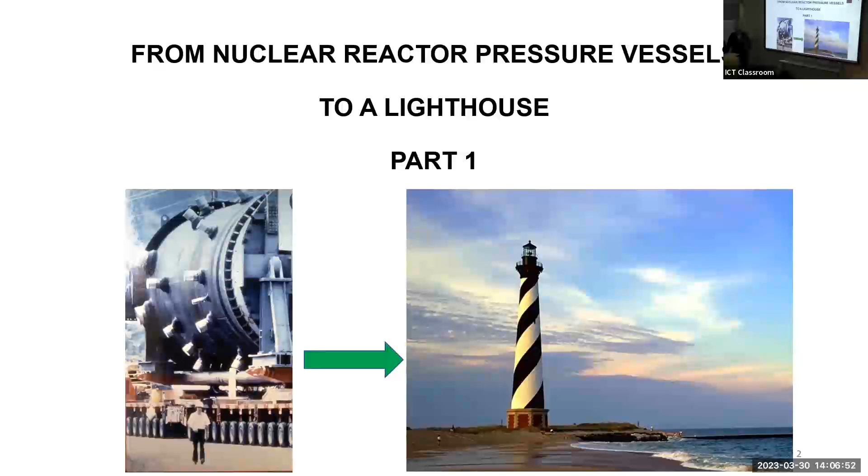So anyway, without further ado, let's talk about moving from nuclear reactor pressure vessels to a lighthouse. As I say, this is part one. Part two will be some other time to be determined. But I consider it a warm-up project for the lighthouse project.

This was 3 million pounds. The lighthouse was 10 million pounds. So it was kind of a practice project for that.

So a contractor comes to you, you're the senior engineer sitting in your office, and he says, hey, we've got to move 2 nuclear reactor pressure vessels from Knoxville, Tennessee, to the TVA's Phipps Bend plant up in Northeast Tennessee. You say, wow, that'd be a lot of fun. He says, oh, by the way, these things weigh 3 million pounds, and we've got to get a permit from TDOT in order to move these.

It's a little bit heavier than your normal weight. And so you talk about the schedule.

Year one, you evaluate and determine what requirements are needed to upgrade the infrastructure. In year two, they move the first vessel and the associated equipment with that. And then in year three, you move the second vessel equipment and do any damage assessment if need be. So you're hoping there won't be any damage, but it'll be assessed in year three if there is.

So if we look at the route, the first leg is 26 miles overland, going from Knoxville up to here. Then it goes back in the water for 35 miles on barge, and then comes back out of the water and goes the last 20 miles up to the plant.

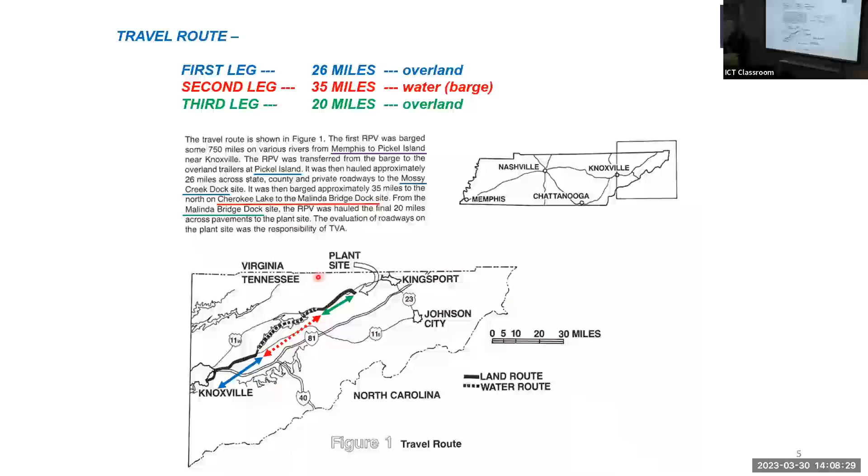Part of the reason for going in and out of the water was the river couldn't be counted on to have enough draft to get the thing moved. These were fabricated in Memphis, Tennessee, which is far west Tennessee, and barged on the Tennessee River up to Knoxville. So that's a little bit of history on that.

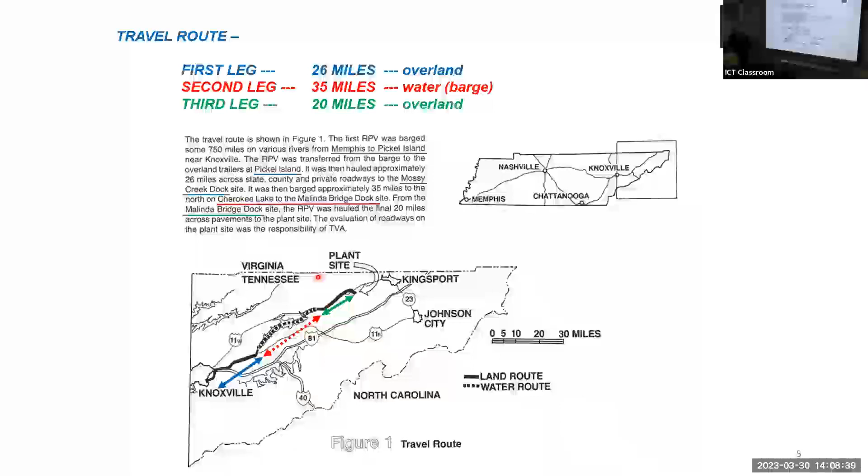Things you're worried about when you talk to the contractor: well, you're concerned about slope stability. Northeast Tennessee has a lot of hills, so you have a lot of cut slopes and fill slopes that you're worried about. We're going to drive 3 million pounds across it. What's that going to do to the slope?

To give you a feel for what this is like, it's like taking 10 feet of fill and moving it down the road. That's what you can equate this to. When I work on projects, I always try to think of things I can relate it to, to give a better feel for what I'm really doing.

Then you're going to be concerned, obviously, about underground utilities, culverts, pipes, and things like that. Pavement design—pavements are designed for millions of loads. When I was in school here, designed for 1 million equivalent single axle loads during a lifetime was a lot. Now you're looking at tens of millions of loads, and not 20 years of life, but 40 and 50 years of life. So things have changed.

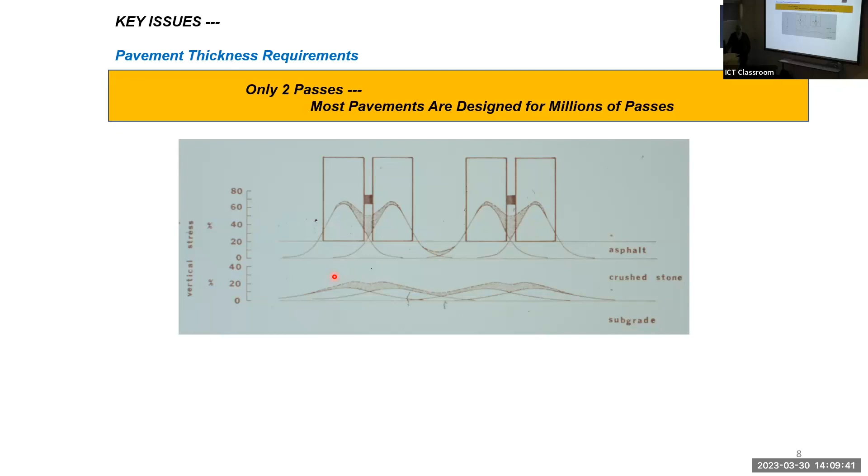But you're only going to have 2 moves with this thing. And the contractor has already won the bid—he's got a $12 million lump sum bid to move these things from Knoxville to the plant site. So you're constrained in your money as well as the time issue.

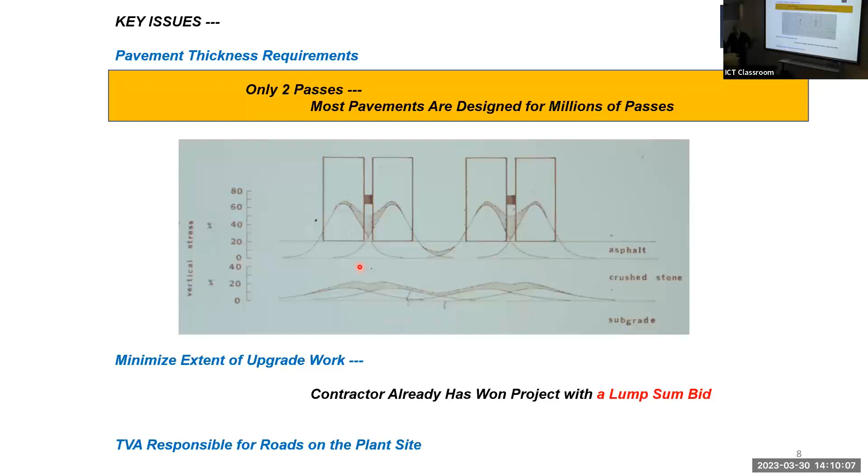You're going to deliver them to TVA's front door, and then TVA will take the vessels from there. But you're responsible for these state, county, and private roads and getting a permit from TDOT.

So what are the objectives? You talk to the contractor, it's the same thing you always hear: on time, on budget, and no damage. That's what the contractor wants. What are you as a consultant concerned about? Well, slopes, underground utilities, where are the pavement sections, what do they need to be, and the bridges—this has got to go across the bridge.

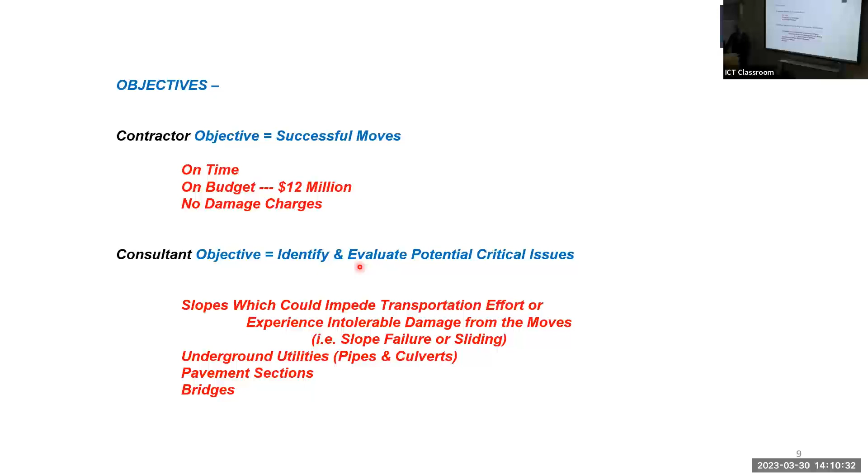Most of those aren't designed for 3 million pound loads. And this is what it looks like. This is the first vessel, and you can see the vessel itself here, and then this is part of the frame that holds it onto the trailer system, along with all the accessories that come with it.

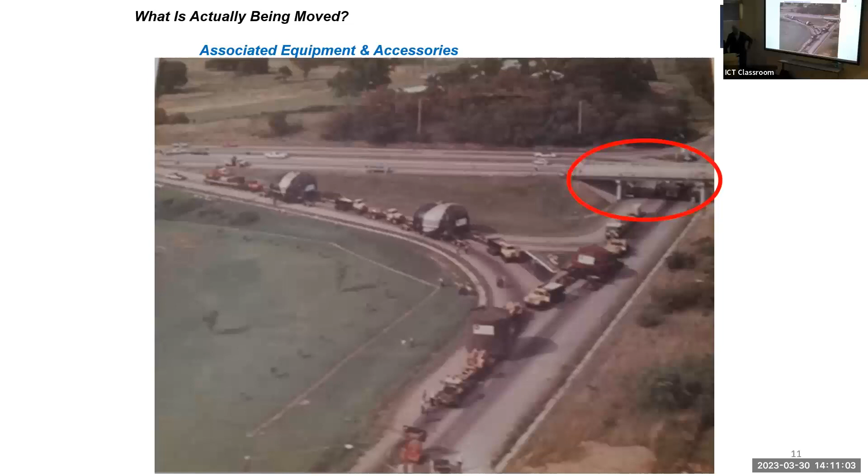The heads for the reactor, the shroud heads, and you can't go under all of the overpasses along the route, so you've got to come off and go around, and sometimes the route gets pretty curly.

So what's the transport system look like? Well, it's a trailer, two sections. The front section is modules - you see 6 of them, 2 across and 3 in length. There are 4 axle lines on each one, so that's 4 axle lines, and then 4 tires, 8 tires per axle line.

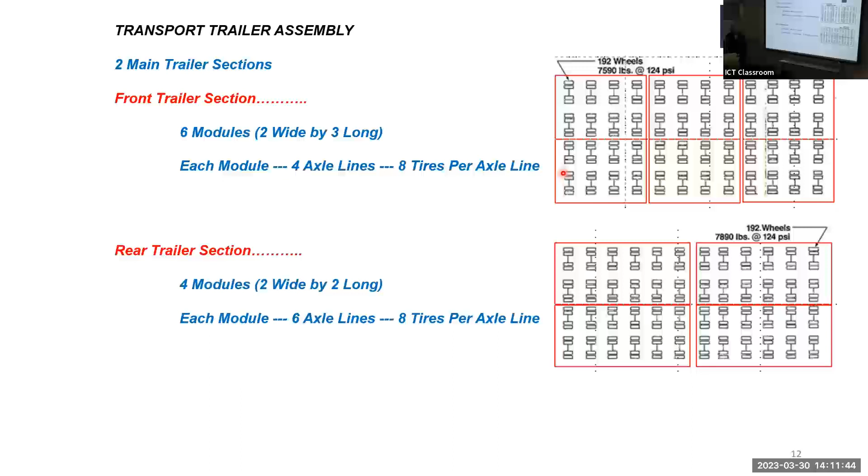This being an axle line, and then coming across to the other module is the rest of the line. The rear section is essentially the same, except it's a 2 by 2 module, 6 axles instead of 4, and each axle line has 2 dual wheels on the end. These are 8 1/4 by 15 Michelins, but not the kind you'll see on your car - they're a little different, as you'll see.

For any of you involved with ABC, accelerated bridge construction, where they build the bridge near the final resting spot and then move it into place all in one fell swoop - a lot of times you'll see these kind of trailer sections used to move those bridge components into place.

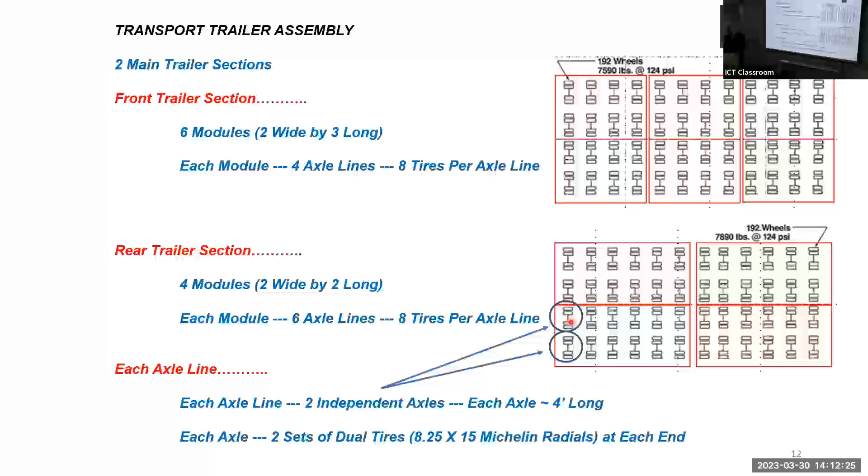So we get it all together - we've got the vessel on top of the trailer system. We've got 12 axle lines and 16 tires in each section, for 24 axles, 384 tires.

It's kind of like what the Greek guy said - I can't think of his name - give me a lever and a place to stand, and I can move anything with the lever. This is kind of the same way: if you give me enough tires, I can move anything, okay?

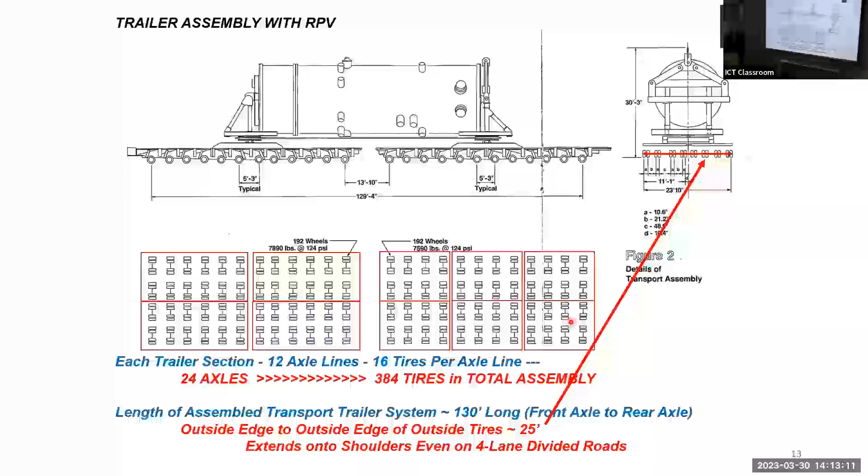So the length is about 130 feet, rear tire to front tire, and the outside is 25 feet wide, outside of tire to outside of tire. So even on the 4-lane divided state route, this is going to hang over onto the shoulder. The height is a little over 30 feet, so you're not going to go under the power lines either - they have to be raised and lowered, and some were actually moved temporarily.

So as you start to think through the project - your little pavement design, that's what I call it - there's a whole lot of other things you've got to be thinking about, particularly if you're the project manager, and places you've got to interface with.

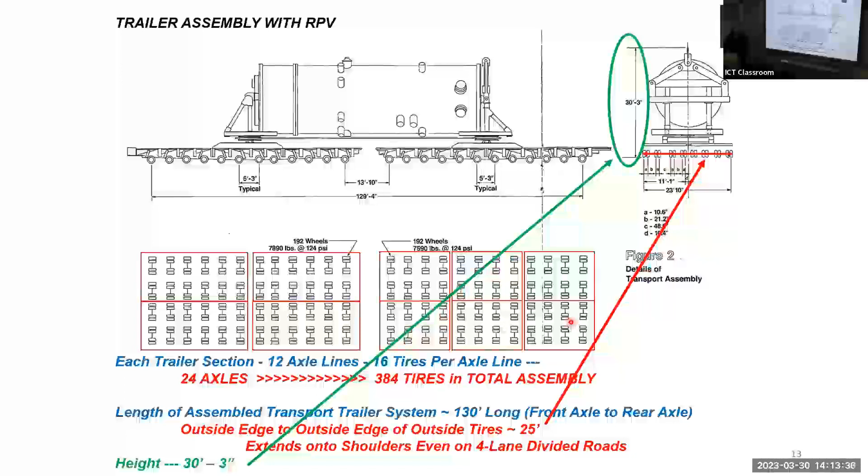If we look quickly at the details: the tire spacing center to center of the duals is a little under 11 inches. The center to center spacing of the entire interior tires is 21 inches. The axle to axle spacing on a section is about 7.5 feet. And interestingly, the spacing between axles was a little over 5 feet - we'll see that's important later on.

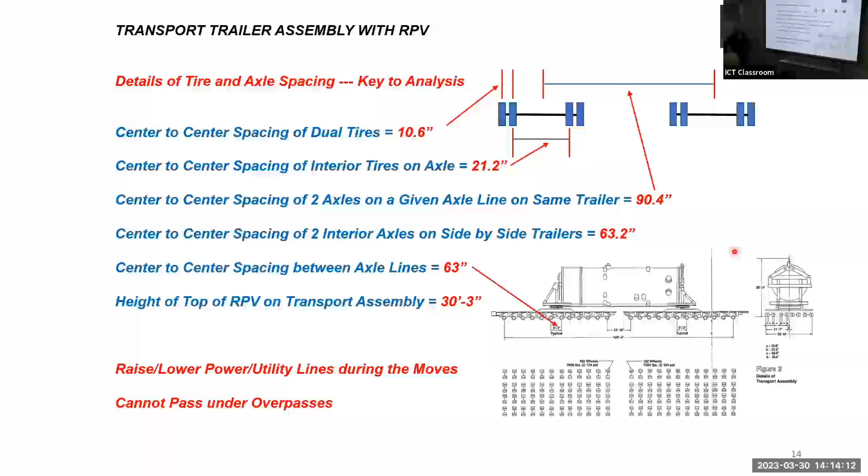And as I said, you've got to raise and lower utility lines, can't go under overpasses, things like that. So in summary, when you get it all together, you've got a weight just under 3 million pounds, using 384 tires - these are 8 1/4 Michelins - with tire inflation pressure of 124 PSI. So these aren't your typical car tires; they're beginning to approach aircraft tire pressure, although they're smaller. The load on each tire - the front is about 7,600 pounds, and the rear about 7,900 pounds.

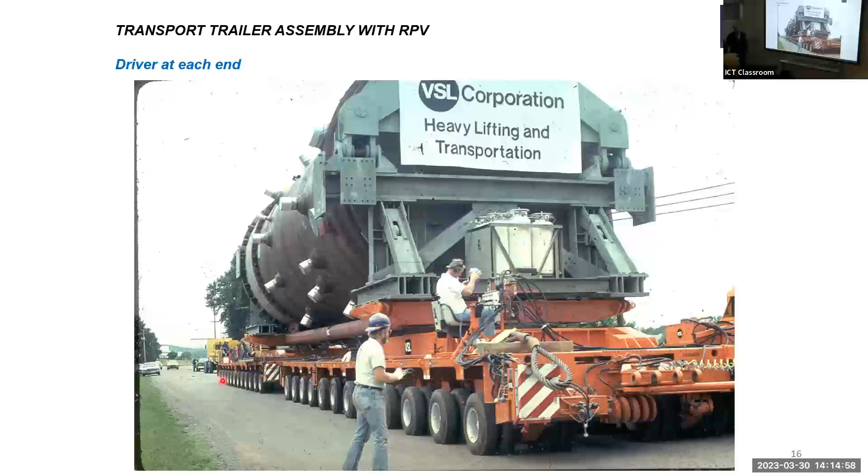This is just another shot of it when it's up and ready to go. You see you've got a driver at the front end and one you can't see at the back - so you've got 2 drivers on this thing. So you look at it and say, okay, how are we going to move it? We've got the vessel up on the trailer - how do we move it?

Well, we're going to pull it with 3 tractors and push it with 2. And the contractor had 2 options for the tractors - one was a Mack and one was a Michigan.

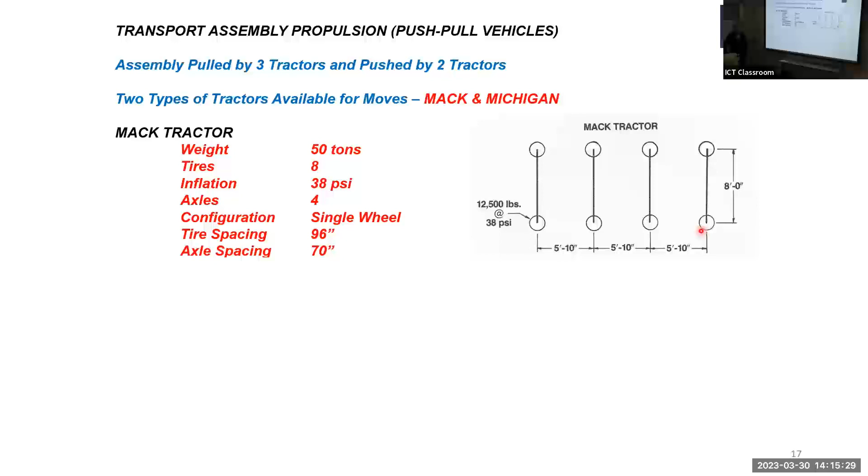The Michigan tractor is a 2-axle single wheel, 24,500 pound wheel loads at 34 PSI. The spacing is about 9 foot on the tires and just under 11 foot on the axle spacing.

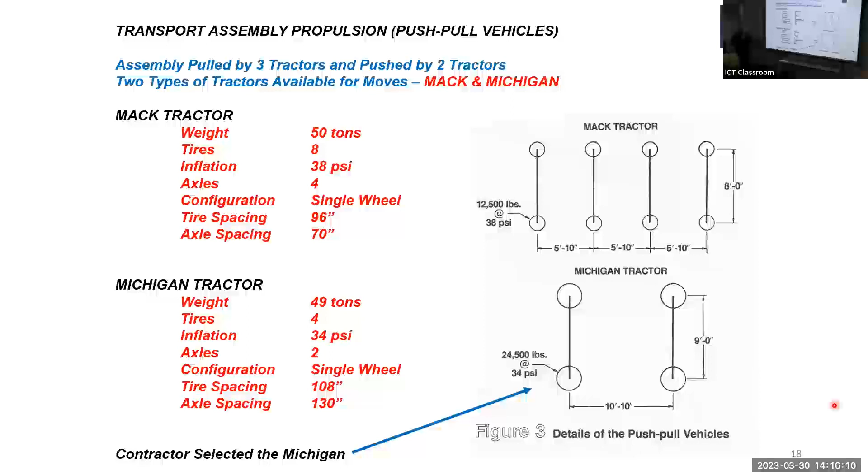The contractor ended up selecting the Michigan, and the reason I think is that with 5 Michigan tractors it's shorter than if they had 5 Mack tractors. Remember, you're going to have to come up and go around corners of intersections on these roads. It's not like you've got a nice 150-foot wide runway you can go down. You've got some roads that aren't even wide enough for this, that you're going to have to upgrade. So this is what the Michigan looks like in place.

This is pushing here, and not quite 25,000 pound wheel loads. So those are pretty hefty on the pavement too.

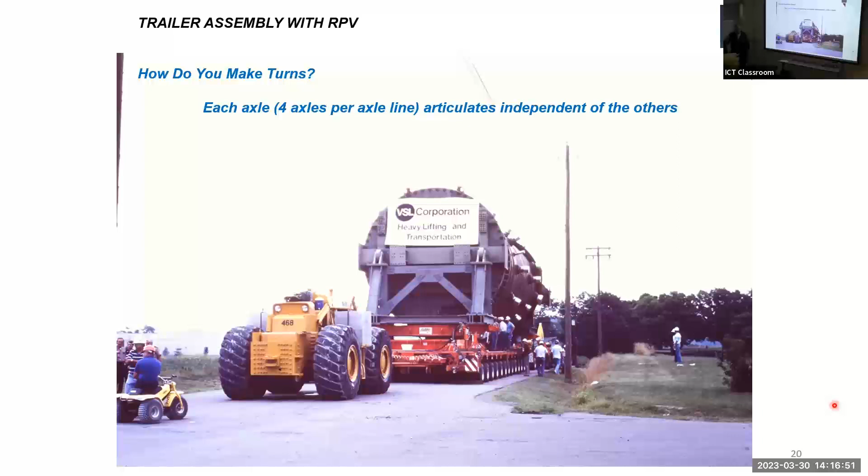So how do you make turns? This is actually going into the page here, but if you were coming out, each axle articulates independently. So as you come up and want to come around that corner, the axles turn as they need to, and we could bring it out here and drive it through the parking lot if we had a need to. There's not a need to, fortunately, but we could do that. And the pavement might be sufficient -- it might not be. We'll see.

Okay, so as a consultant, what are you going to do as you go through trying to figure out the pavement design? We're going to concentrate on the pavements, not the slope stabilities and culverts and the like. But you're going to do a site reconnaissance -- you want to drive this 46 miles and see what's out there. What can I get for existing construction information? What do I think is out there? Then you're going to come in, core the pavements, drill soil test borings, do field testing, lab testing, do your high-powered engineering analysis, and then validate the design procedure.

This is a key issue. As you go through a design and you're all ready to go, how do you validate or get confidence that you think it's going to work? And I'd ask Jordan, but he already knows.

Then quality control during construction to be sure that it's being built the way it needs to be. Go and observe your projects, see how they perform, so that you can then put that into your engineering judgment as you go through your career, okay? And then we'll evaluate any damage claims, which hopefully there aren't any, but we'll see.

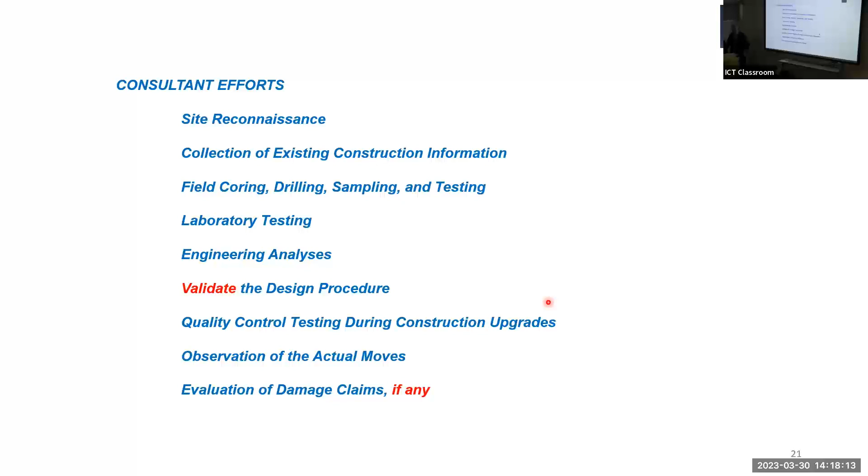Remember, this is 46 miles -- that's just under 250,000 feet of pavement. We're not going to catch every little thing out there, but this thing will, okay?

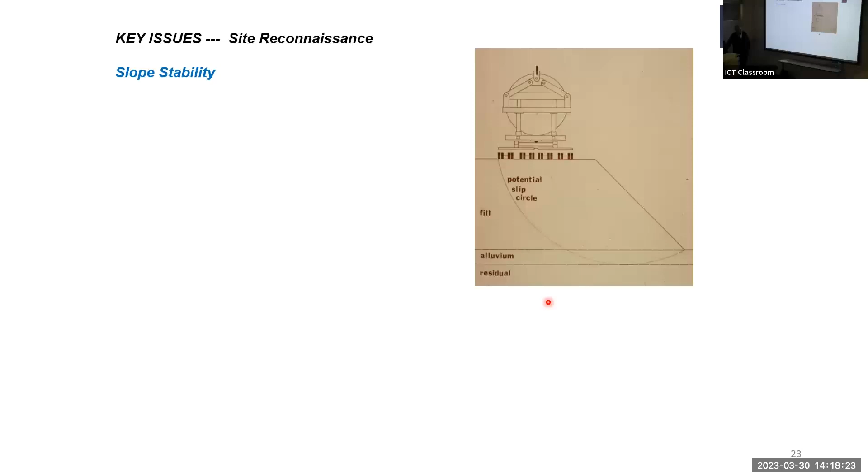So we go through, we review our plans, we do our site reconnaissance, we look at slope stabilities, and we see what some of the slopes are like. We see there are some pretty good slopes here, and yeah, we're pretty close to the edge at the top on these things. So we've got an issue with that.

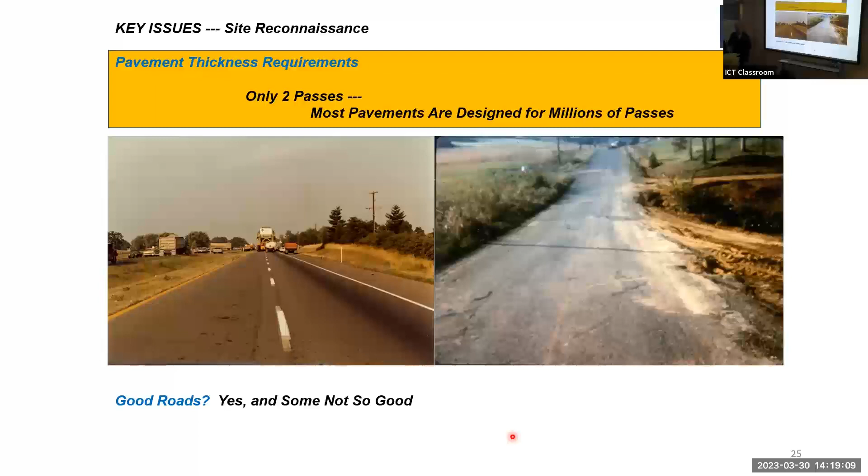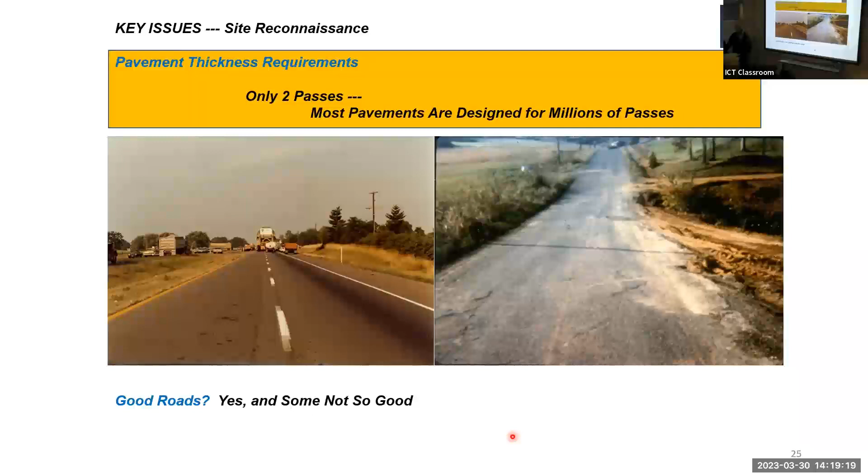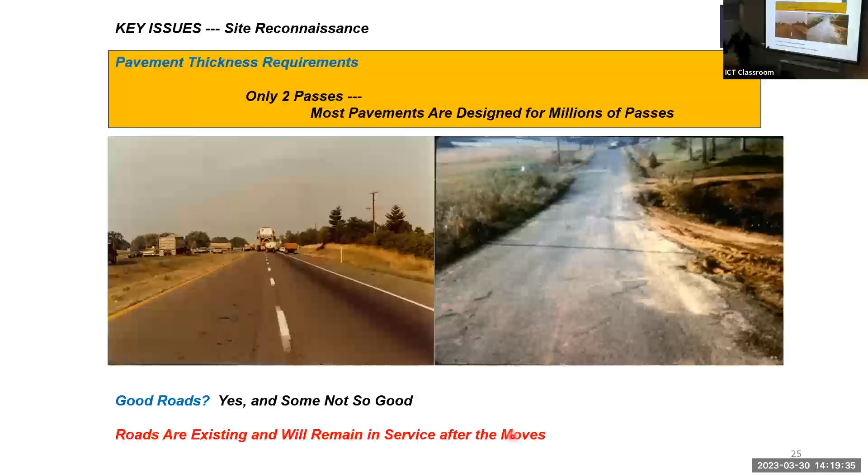Okay, and these roads exist, with the exception of some access roads to get off the docks and up to the industrial parks. All the roads are existing, so they're asphalt surface now, in service, and they're to remain in service after you make the moves, okay?

So what do you propose to do to evaluate what's out there beyond your drawings and as-builts and all that? You look at your drawing, everything's nice and neat, perfect little pavement sections and the like. So we say, how are we going to do that? Anybody got any ideas on how you would do that?

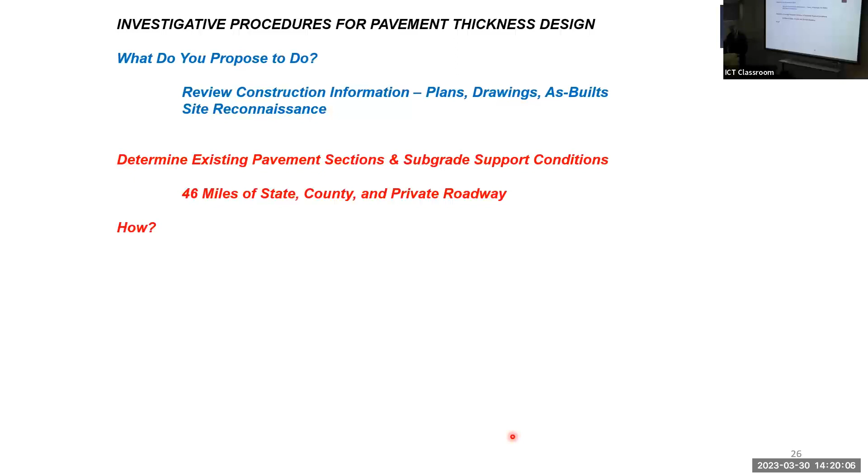I do ask questions in talks. No ideas? You're just shy, I know.

Well, we're going to cut cores. We cut cores of the pavement to see how thick the pavement section is, the asphalt, the crushed stone, or whatever's out there. And we get our cores and line them all up. We say, wow, this isn't as nice and neat and uniform as we thought it was, okay?

Just for historical purposes, neither one of these photos are from this project. This photo here is actually from the LTPP sampling program in the southern region. The first core was actually back here. I took it to cut it up and give a cut section out to some of the members. But this is the first section that was tested in LTPP in the southern region.

These happen to be from a runway where we thought we had all of the thicknesses pretty well defined and pretty uniform. You see, not the case. So just because you look at the drawing doesn't mean that's what's out there, okay?

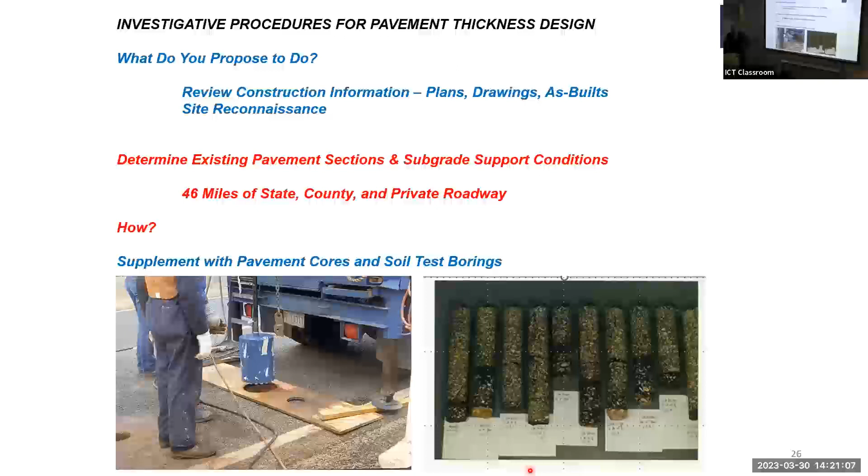So you're going to also drill borings. You're going to do undisturbed samples. You're going to get the sample and test it, but you're also going to do what's called the standard penetration test.

Anybody know what the standard penetration test is? Okay, a couple of people do. Geotechnical engineers know it well, it's been around for a long time. You have a split spoon sampler that you're driving into the soil with a 140-pound hammer, dropping 30 inches. You seat it 6 inches, then count the number of blows to drive it 12 inches. That's the standard penetration result.

Okay, so you're going to do borings. How many would you do? You've got 46 miles, maybe a couple hundred. Anybody vote for 200 or more? Anybody vote for 500? You vote for 500? Okay, okay.

How about 49? They say, why 49? Okay, well, kind of simple. We looked at, well, where are we going to do them, the traveled way or the shoulders? We've got traffic control issues.

So on the state roads, what we did was we drilled and cored in the shoulders. And if the shoulder results matched what was on the drawing, we assumed that the traveled way for the highway matched what was on it. Now you can pick at that all you want, but that's what we did. And fortunately, I'm here to tell you, so it must have worked, okay?

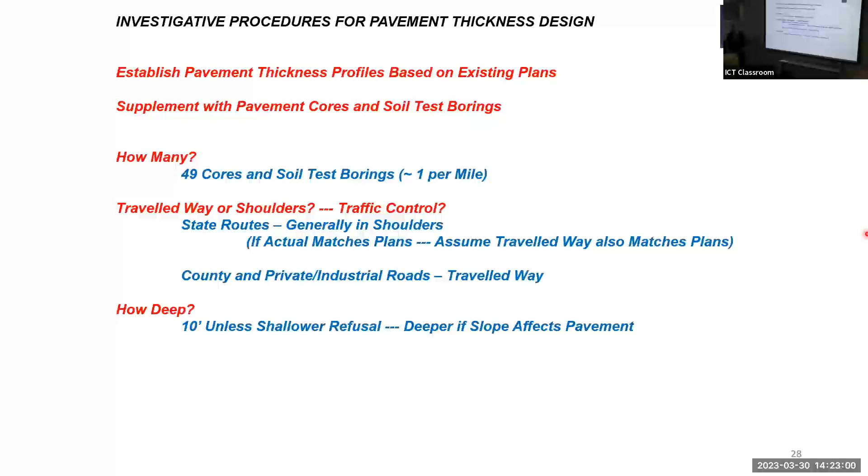The county and private roads, obviously, you're going to drill in the traveled way, because if you remember the county road, there's only about 1.5 lanes of pavement there right now. How deep? 10 feet, that's about what we're looking for with the pavement. We're going to go deeper if we've got issues with slope stability and things like that.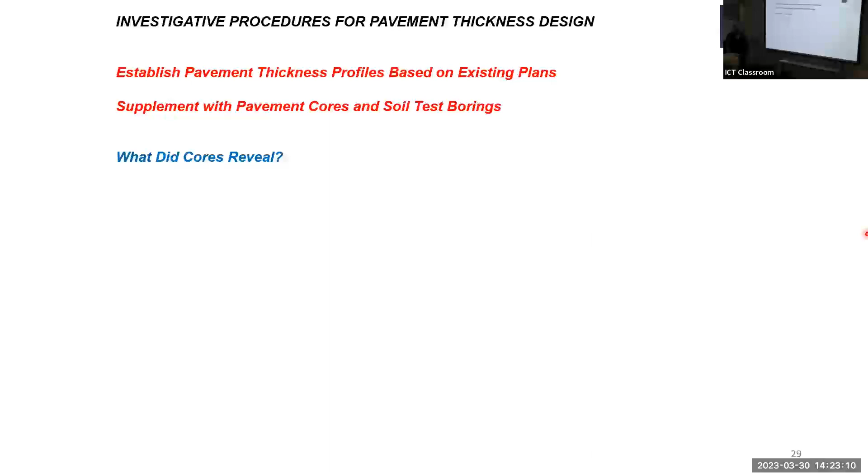And samples, we've talked about standard penetration, undisturbed. What did we find? Well, interesting. For the state roads, we found about 15 inches of asphalt and over 12 inches of crushed stone over subgrade. Looks like this. For the private roads, the industrial routes and the like, we found 4 inches of asphalt over 8 inches of crushed stone. That's not too bad, that's what you typically would find in Northeast Tennessee for industrial type pavements and the like, with the kind of CBRs we'll talk about.

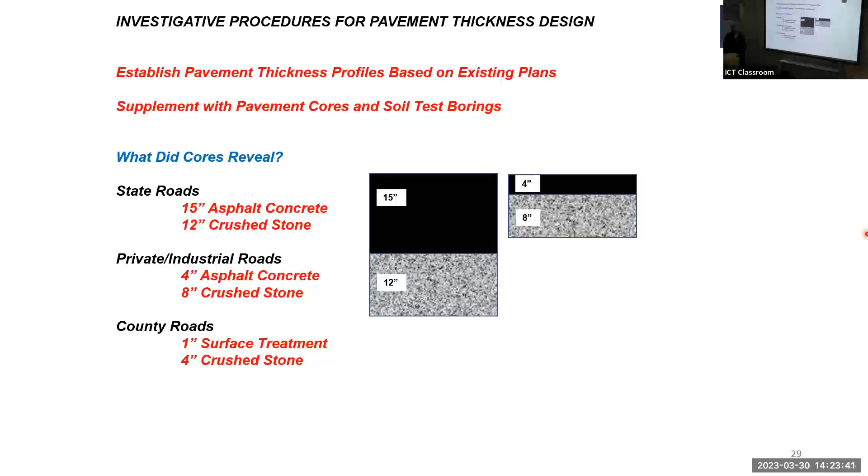The county roads, though, had 1 inch of surface treatment over 4 inches of crushed stone. And you remember the one you saw, so we're saying, I don't think the county roads are going to cut it here. And we have one very short section, about 200 feet, that had concrete pavement. We said, well, we're not going to mess with it, we'll go across it. If there's any damage to it, we can replace it, and it's not a big issue.

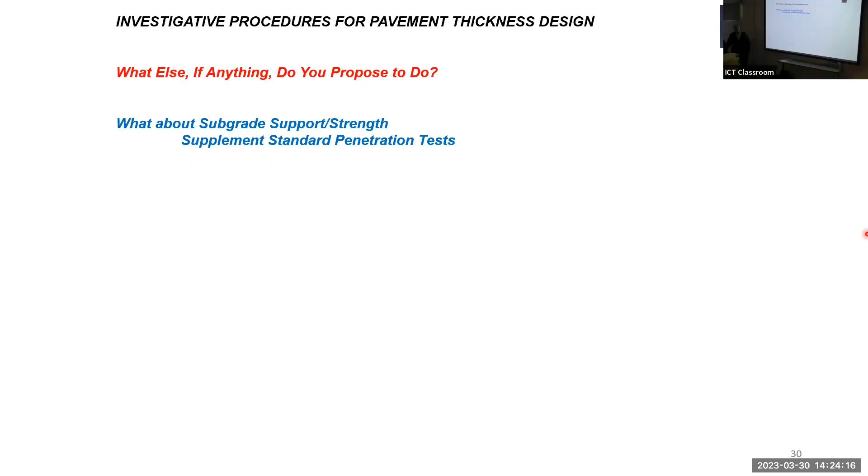Okay, so what else would you propose? Anybody got any ideas? What would you supplement all that drilling and coring with? Ever heard of the CBR test, the California bearing ratio? You thought you had long forgotten it, right?

It's kind of like, now standing here in front of one of the most august research groups in the world, and I'm talking about a test that's 80, 90 years old. But always remember one thing: if it worked in the past, it'll probably work today, okay? So never forget what's out there in the past. There may be times when you're like, just like the Benkelman beam, we have the fancy falling weight deflectometer.

We've been using it for almost 40 years now. But every now and then we go back to the good old Benkelman Beam, developed in the WASHO Road Test in 1952, because we can get some information quick and carry the beam in a car or fly it on a plane to get it there. Can't do that with the FWD.

Okay, now we're going to perform lab tests? No. We're concerned about what's actually out there in the field. So we're going to perform the test down the boreholes in the field, at the top of the subgrade, with the current conditions that we have.

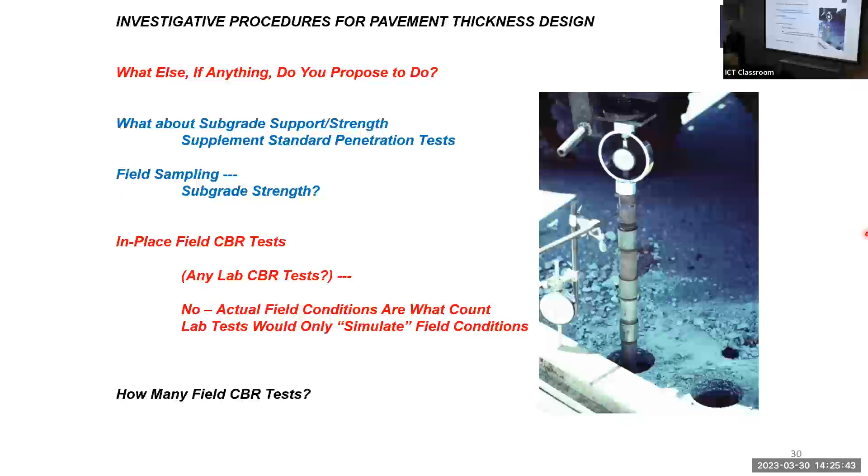How many would you do? Somebody give me an estimate of how many tests you would perform. We know we did 49 borings. So 49? Huh, 49, okay, well that's a good toss. How about 42? Now you say, why 42? You know, why not 50 or 60 or 20?

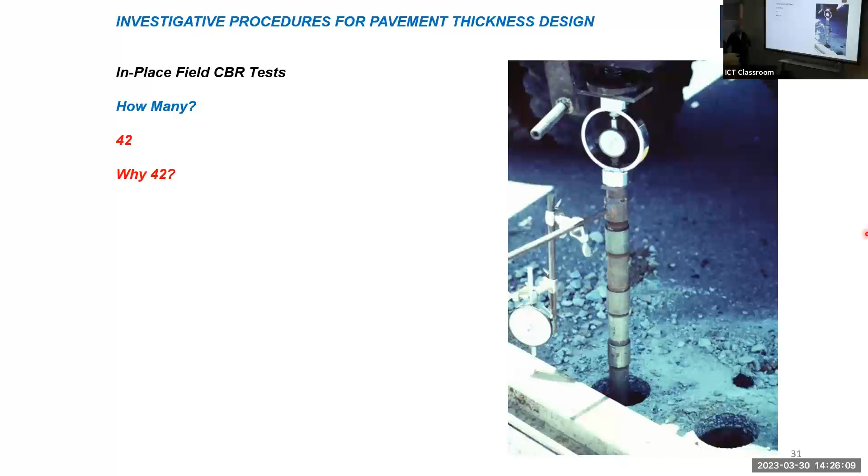Well, when we looked at it, we identified from the borings and the plans and everything, about 26 different sections of pavement out there, most of it based on time of construction and things like that. So we said, well, that'll give us 1 or 2 tests per section of roadway. And we'll do more in these county roads, a closer frequency than the state roads, because the state roads are much better, as we'll see. We already know they're 15 and 12 — that's going to be pretty good pavement, we hope.

And time and money. You've got time issues for how many tests you want, and money. Remember, contractors already bid the project. He's going to get a fixed $12 million for this move. So every dollar you spend is a dollar of potential profit that the contractor could have had. So he's going to want you to do the bare minimum, and you're going to want to do as much as you can so that you can sleep at night, okay? So you've got to find that balance.

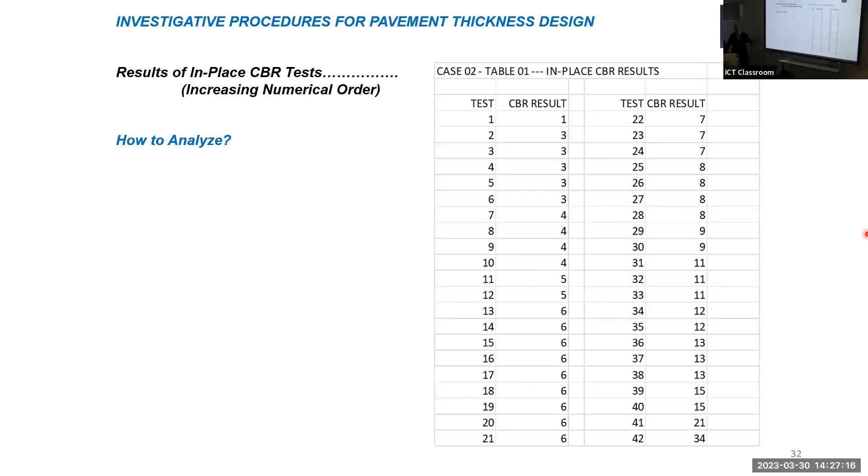So these are the 42 CBR tests. We say, well, why didn't you look at them in each section? We said, we're going to take the whole route as a whole for the subgrade and analyze it that way. You can argue it both ways, but this worked, and we'll see here.

So how we analyze it: draw up a nice little histogram of the data, whatever it is. And we see that the median is about 6 to 7. That's the value that half the data is above, half the data is below. And so we say, oh, that looks okay.

So do we use the median, do we use the maximum value, or do we use the minimum value? There's where your judgment comes in. Whether you're dealing with a CBR equation or a nice big fancy finite element program, what are your inputs? Marshall Thompson always told us, a lot of times we're sitting out here measuring something with a micrometer that we marked with chalk and cut with an axe. And we're measuring it with our micrometer. So always think about, what are you doing out here? What are your inputs?

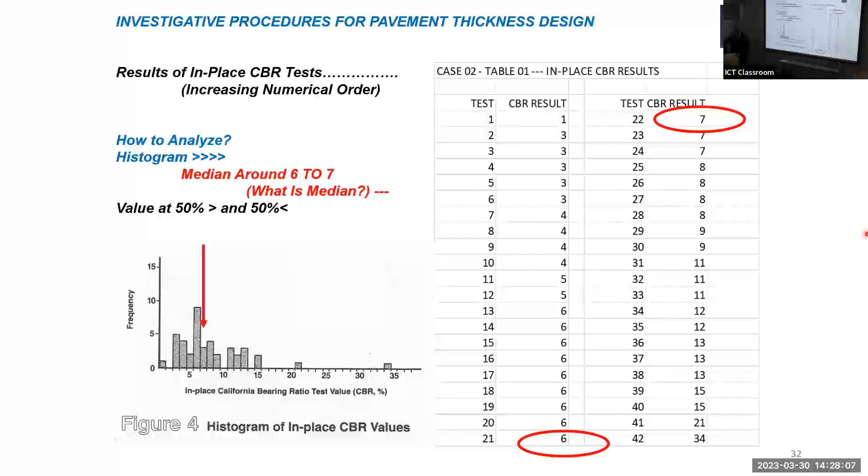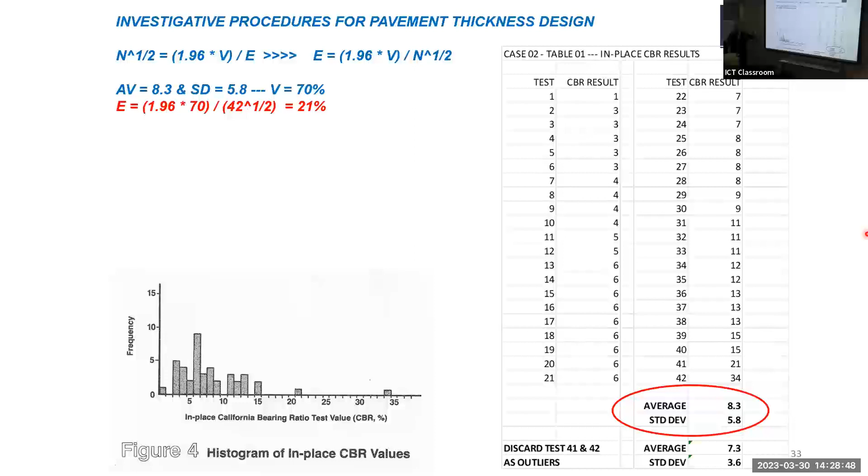So we look at that and see that the average CBR is about 8.3, standard deviation is a little under 6, and that's a coefficient of variation of 70%. That's fairly high. We said, we're going to turn our sampling equation around. If we know this coefficient of variation and the error we're willing to accept, we can calculate how many samples we need to take. Well, here we know how many samples we took, and we know the standard deviation, which gives us coefficient of variation. So we can find that the error in that answer was about 21%. So with 8.3, my error at 95% level of confidence is about 1.5 of CBR.

They said, but looking at tests 41 and 42, those look to be not realistic for the average. So we're going to throw those out, and we now have an average of 7.3, standard deviation 3.6. And if you look in ASTM, there's a procedure for discarding outliers, so you can actually go through a process to calculate it.

But as Ernie Barenberg always said, my engineering judgment tells me I should get rid of 21 and 34. Okay, so we do that. Now our average is 7.3, standard deviation 3.6. Coefficient of variation is still pretty high, it's 49%, but our error is down to 15%.

So now maybe our error at the 95% level of confidence is within 1 on the CBR average. What we end up saying is we're going to pick a CBR of 5. That's the 75th percentile value.

In other words, 75% of the data is above that, 25% is below. Does that mean we have a 25% chance of failure? No. If you look back at most of the designs and where they drew all these design curves, you'll see they were pretty conservative when they drew the curve. So you're going to have a nice line that you calculate, but you really should be using a big wide paintbrush, okay?

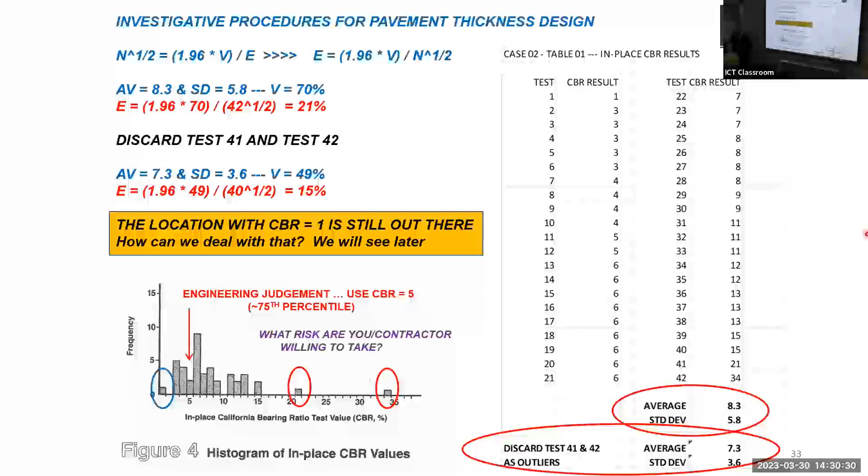But anyway, moving ahead, it's a case of how much risk are you willing to take and how much risk is the contractor willing to take? And oh, by the way, we still have that CBR of 1 out there. But we'll deal with that a little later.

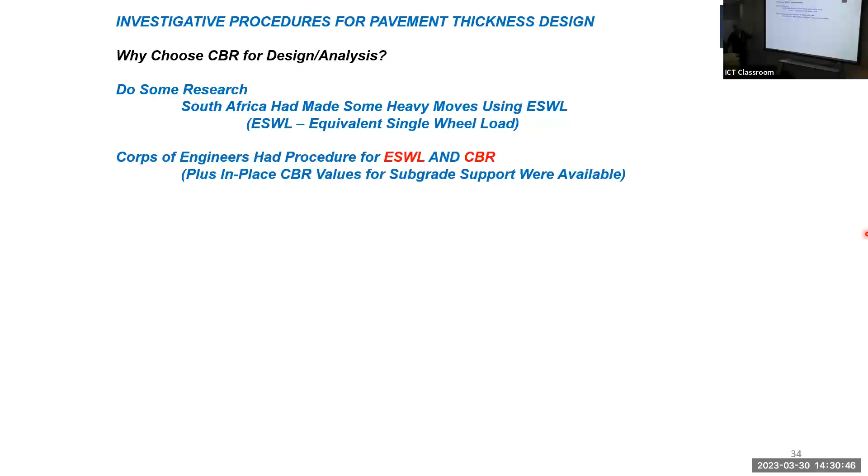So when it comes time to do the evaluation, we said, wow, South Africa has done some big heavy moves with equivalent single wheel loads. Corps of Engineers has a procedure for that. So we'll use a good old CBR equation. They've had this modified several times, but this is the one that we used.

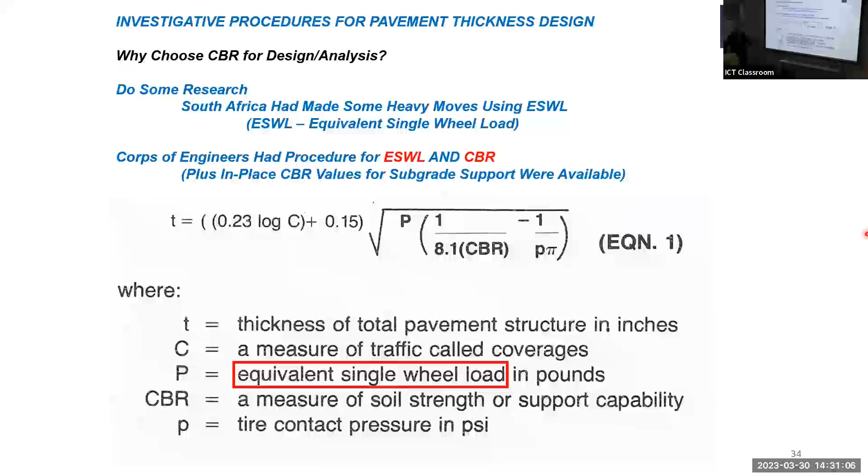And so the thickness of the total pavement above that subgrade of CBR 5 is a function of how many times I'm going to go over it, what's the load, what's the pressure, and what's the strength of my subgrade. So you can go through that and see.

We also found in the Highway Research Record Board a paper from about 5 years earlier transmitting heavy loads over pavements, and this is how to turn multiple wheels into an equivalent single wheel load. So we use this curve to take those tires and convert them to a single tire.

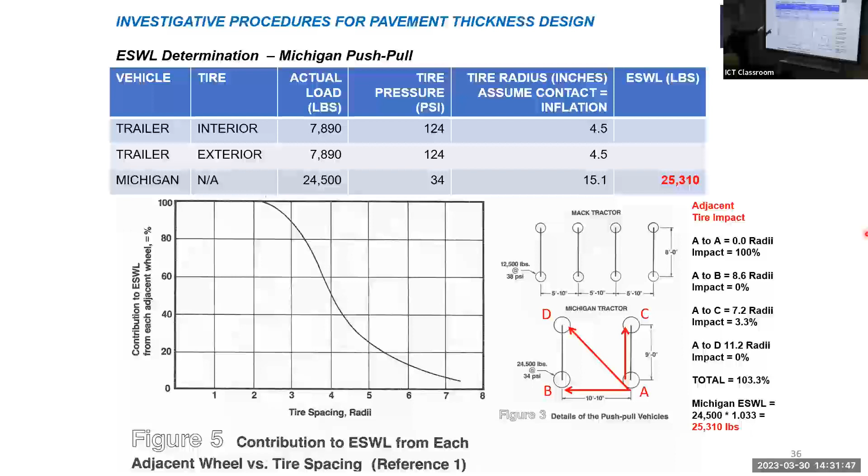So we look at the Michigan, we take tire A, we look at the effect of B, C, and D - it adds about 3%. And so our load, the equivalent single wheel load, goes from 24.5 up to a little over 25.3.

We look at the trailer, and we're assuming in this that the contact is circular. That's not exactly correct, but you're going to find a lot of times you got to make simplifying assumptions when you get out in the real world.

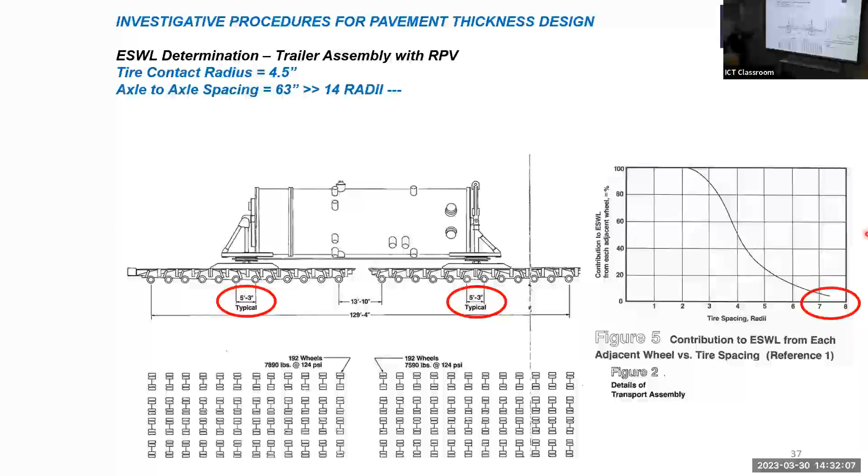So when we look at the 4.5-inch radius, the axle spacing is 63 inches - we're 14 radii between the axles. We're off the chart, no effect axle to axle based on this equation. So no impact from those, and each axle then becomes a single pass. So one move, 24 axles; at the second move, 48 axles go across to 48 tire loads.

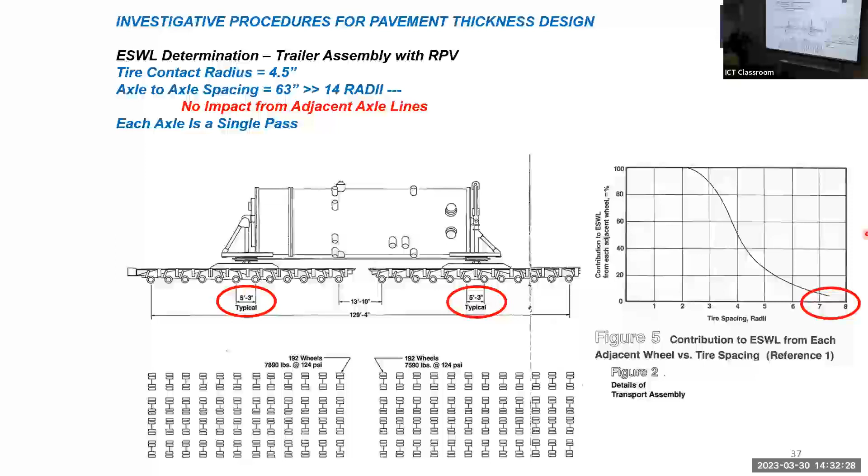So we go through and look at what's the impact of the spacing of the tire. We can go through all of those different ones and find out that it's about 2.5 times. So that 7,800, 7,900 becomes a load of about 19,800.

We chose the rear one, again, being on the conservative side. The front trailer is a little less, but at some point you can be getting so fine grained on things that you lose track of where you're at, okay?

So we say the trailer is 19,800 pounds single wheel load. The Michigan's 25.3, so it must be more critical - just looking at those numbers without going through the design yet.

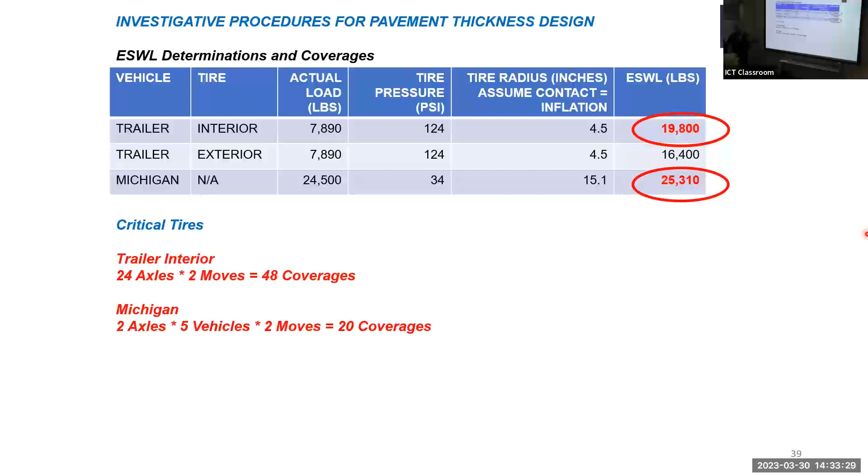So we go through the design and we see, okay, the trailer, an interior tire is going to have 48 coverages. The Michigan is going to add 20 coverages, but it's a different tire load and pressure. And we got to look at the combined effects of those two. How do we deal with the combined effects?

Well, we look at our subgrade, and we see we got to have a cover of thickness T. Well, we're going to assume the crushed stone is CBR of 100. How much asphalt do we need over that?

One of the things you need to look at is when the CBR of the crushed stone gets to 48, the equation breaks down. The thickness of asphalt goes negative when the CBR goes above 48 on the crushed stone. So you got to understand what are the boundary conditions of the formulas you're using.

So we go through and look at these - these are the parameters for coverages, loads, contact pressures, and we got to look at the combined effect, but we lucked out. When we did our curves for thickness versus the number of coverages, look at the Mack, which wasn't used, it's a lot more coverages for each given thickness. The Michigan and the main trailer are almost identical.

So we said, okay, for the Michigan, 9 inches is needed. For the trailer, 11 inches needed. And if I just say I'm going to add the 20 and 48 together, look at that, then I need 11.5 inches.

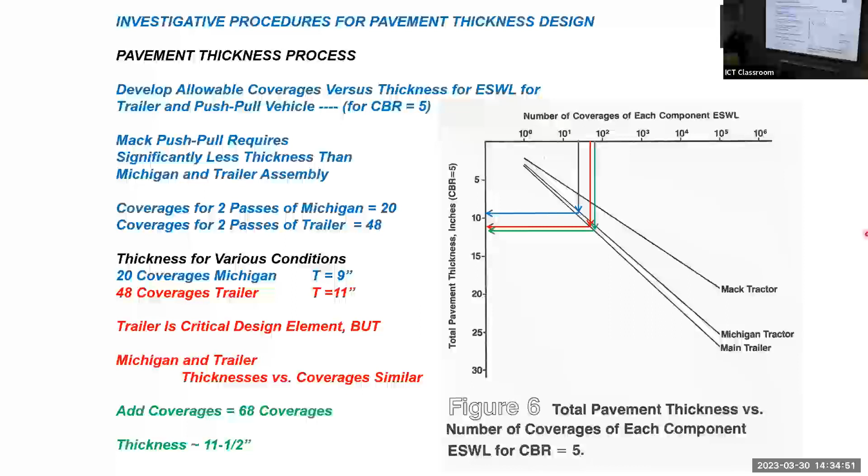So I'm just going to combine the Michigan and the trailer, even though it's not exact, but that's a conservative look at it. We'll look at a factor of safety of 1. Pavements don't normally use factors of safety, you're designing them for a factor of safety of 1. You have a life of 20 years, 40 years, and you're designing it such that you think it's going to fail at the end of that life. And the failure is not typically catastrophic, not like a structure.

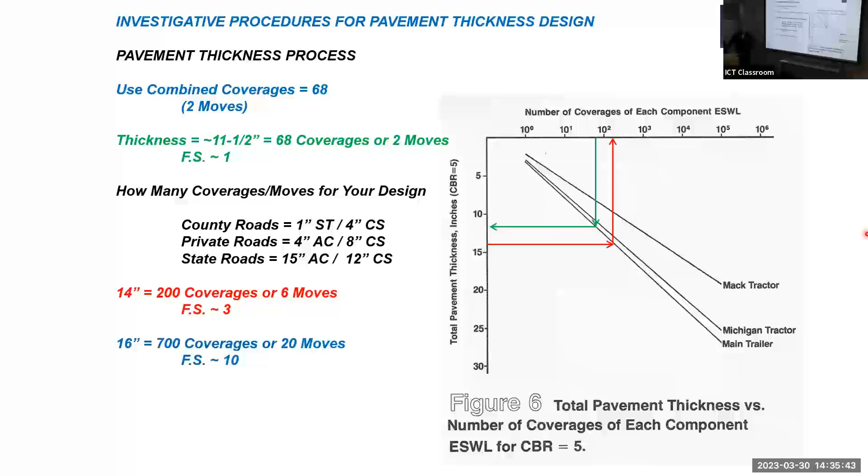We look at it and say, well, we need 11.5 inches. Our county roads don't make it, our private roads are probably okay, and our state roads are way over the line. But what if we have 14 inches? That gives us a factor of safety of 3, so we've got more than a life of just the 2 passes. And if we go to 16 inches, we have a factor of safety of 10. So for the county roads, the private roads, the industrial routes, I want 14 inches, and for the state roads, I want 16 inches.

Well, I'm in good shape because I already got 27 inches, 15 of which is asphalt. But the Corps of Engineers says, regardless of the thickness or the strength of the material above it, this would say 16 inches, whether it was all asphalt, crushed stone, or concrete. Now, common sense tells me that can't be right.

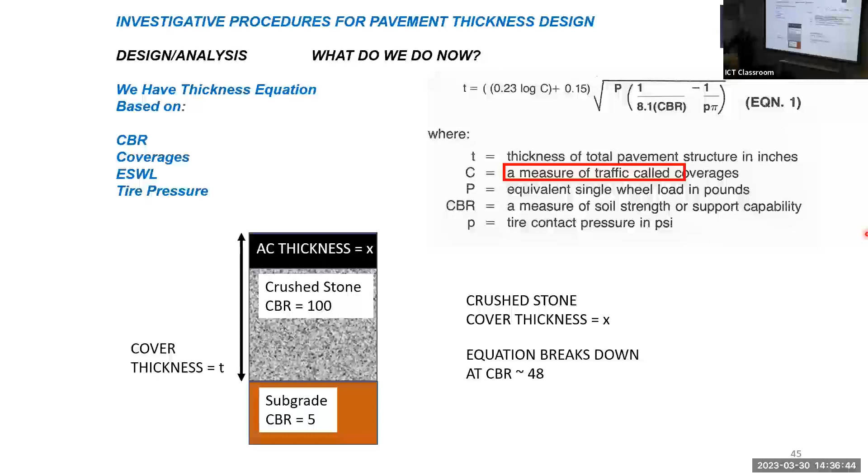So we look at what are we going to put in for the pavement. Crushed stone is our basic material. How much cover for that, and what should it be? We said, when we look at this, we need a cover thickness of X. How much should the asphalt be? Again, I look at what can I compare this to? And this is like moving 40 semi-tractor trailers stacked on top of each other, or 4 747 aircraft stacked on top of each other. They said, we're not going to land a 747 out here, but we'll use a thickness that might work for a 747.

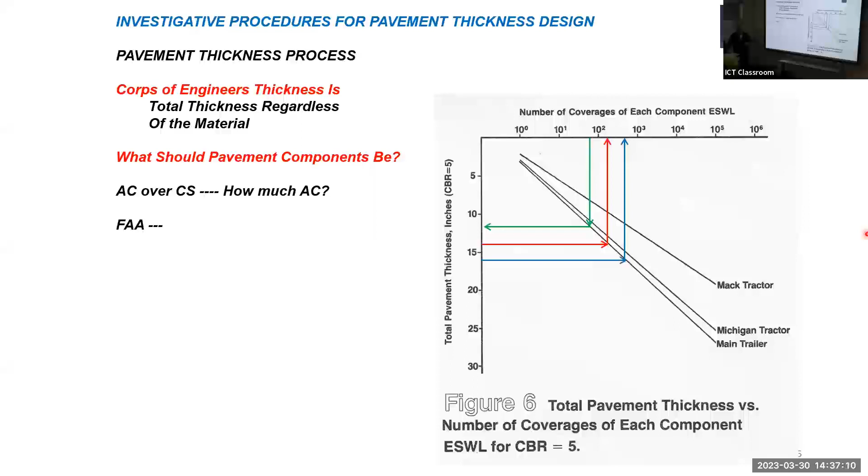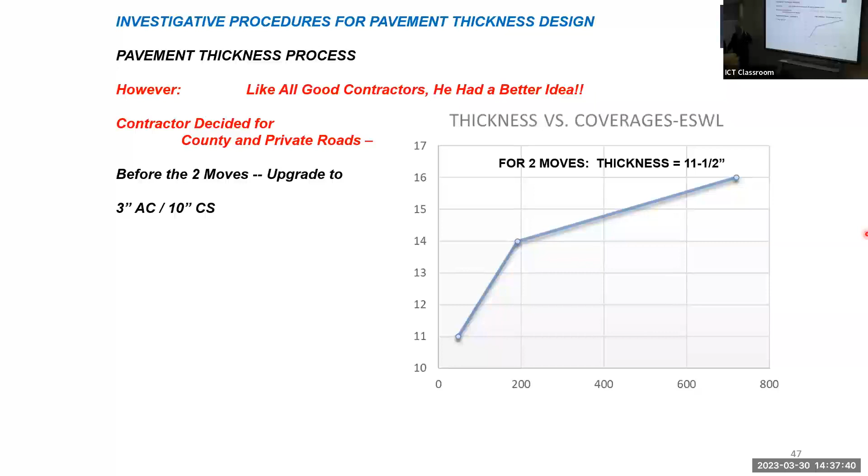So we went to the FAA's procedures, and they required a minimum on runways and taxiways of 4 inches. They said, good, our design will be 4 inches of asphalt, 10 inches of crushed stone for the private roads and county roads, and the state roads would be 4 and 12. And then we can do a little design curve here for thickness versus coverages, because the contractor always has a better idea than you as the engineer did. He said, what I want to do is put down 3 and 10, or upgrade to 3 and 10 where I need to upgrade, and after the second move I'll put down the last inch. And these people, particularly the county roads, will think they have an interstate highway.

He said, that's interesting, so are you comfortable with that? Well, you look and at 13 inches you have a factor of safety of about 2.2. You say, well, I guess, but never be afraid to walk away from value engineering or a design change, because once it's made, it's yours. You've bought it.

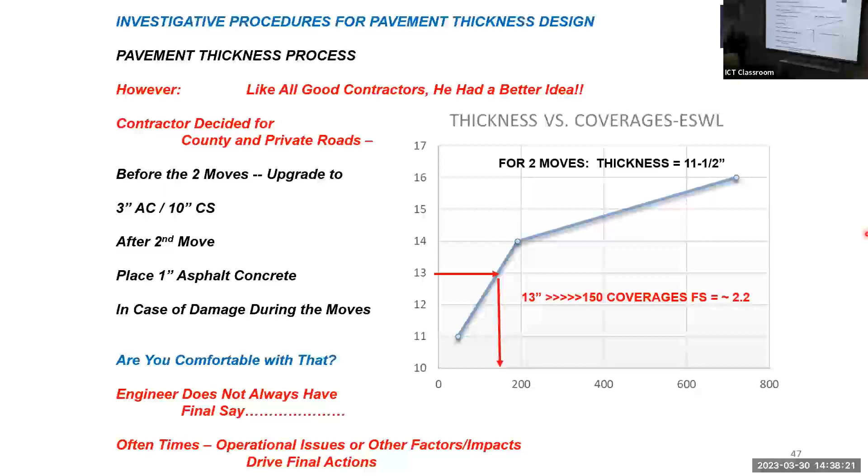So always remember, the engineer doesn't always have the final say. Operational issues, a whole host of other things can drive that. So how do you validate this procedure?

Well, Jordan, how did we validate it? I think you loaded a truck with the load plates, right? Simulated a proof rolling thing. Right, we got one section of module and jacked the wheels up. These axles can go up and down 24 inches, so we jacked all the axles up but one. We left one just kind of skimming the surface for some stability, put steel plates on it till we simulated one axle, and walked 46 miles watching how it did.

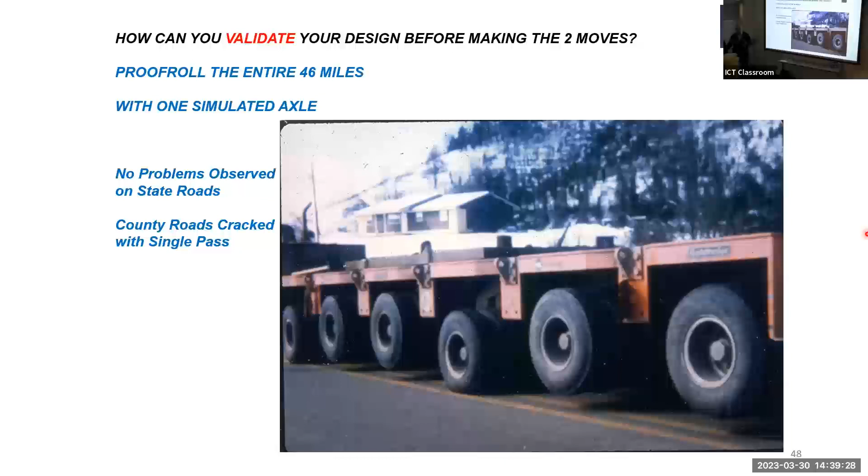One of the guys in our Knoxville office, Brad, probably weighed 250, 300 pounds, about 6'6". He walked the entire 46 miles, but I walked the last 8 miles with him because I wanted to see what we were seeing out there too. Always go out and look at your project. So no problems on the state routes, and the county roads were beginning to crack up with just that single axle. So we say, okay, we know we're between the two bounds. Obviously we need more in the county road, and the state roads are fine. So we're good to go, we move ahead.

So how did it go? Well, there weren't too many problems. The state roads are pretty substantial.

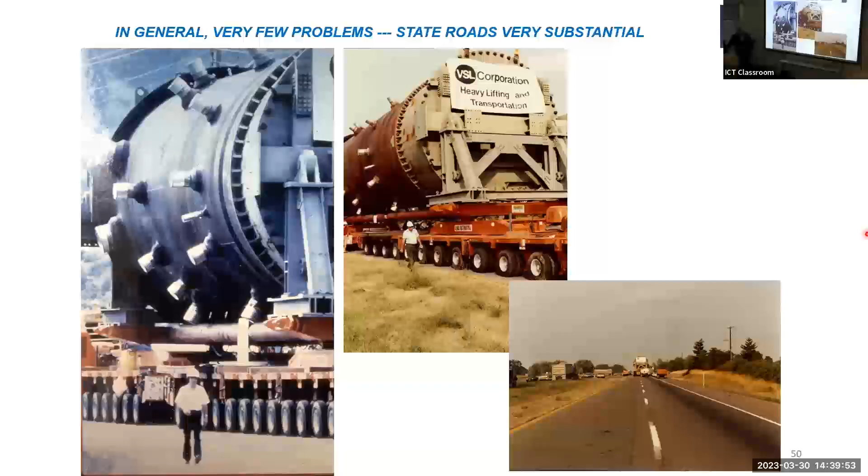You can see you go right down the state roads. And today, people could come right up to this thing. This was the biggest thing to hit Northeast Tennessee back in 1980 that you could think of. Today, insurance and litigation would force the contractor to keep people much further away.

So when you get out on projects, site safety, insurance, and litigation are prime issues that you need to be worried about.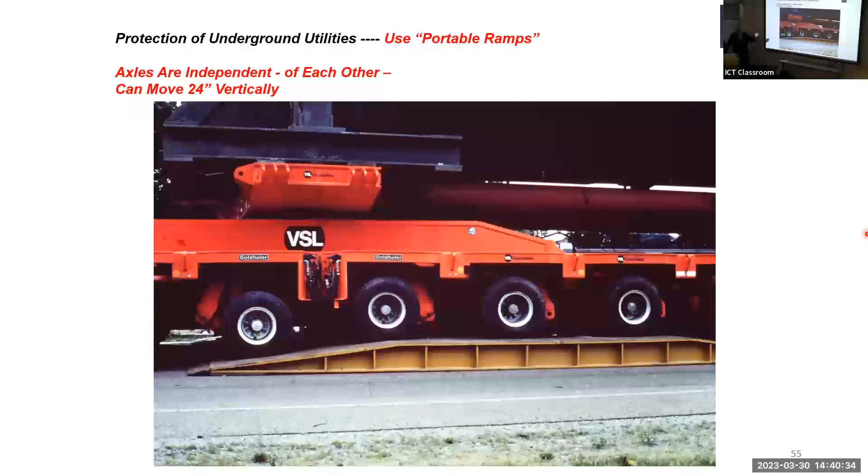Here, you look at that and say, what's going on? Got a lot of people standing around. Well, one of the axles failed to retract on the very first day when it was going over the bump, so to speak, and blew a tire. There was a lot of standing around for several hours while they got it to crawl back into the middle. Obviously, it wasn't one on the outside that blew, it was back on the inside.

So the contractor abandoned the ramps with no problems. Now, if you remember back, we did the proof rolling with the single axle. We didn't use any ramps, and we went the entire 46 miles. So you already know that's probably going to be okay.

So how can he do it? Like I said, the load is more spread out than the analysis model. So always look at your model and how good it is compared to what's going on in the field. And if your model doesn't give you the right answer, you probably have a wrong model.

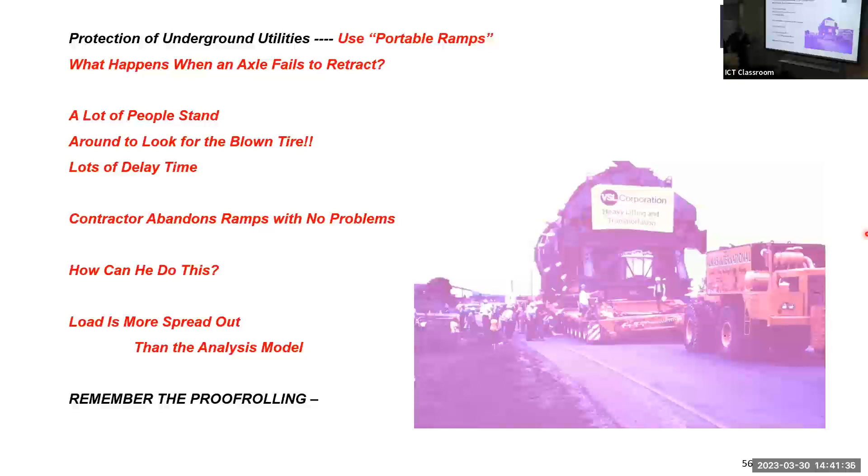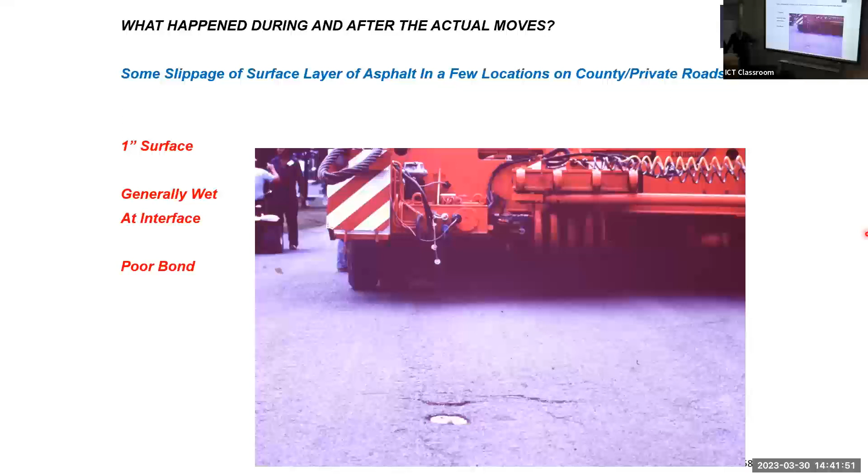So proof rolling, we already knew that probably would not be a problem. There were problems along the way. You can see here there's a little bit of heave in the shoulder, some shearing of the asphalt. This is only a 1-inch overlay, wet, not much bond in the industrial road here.

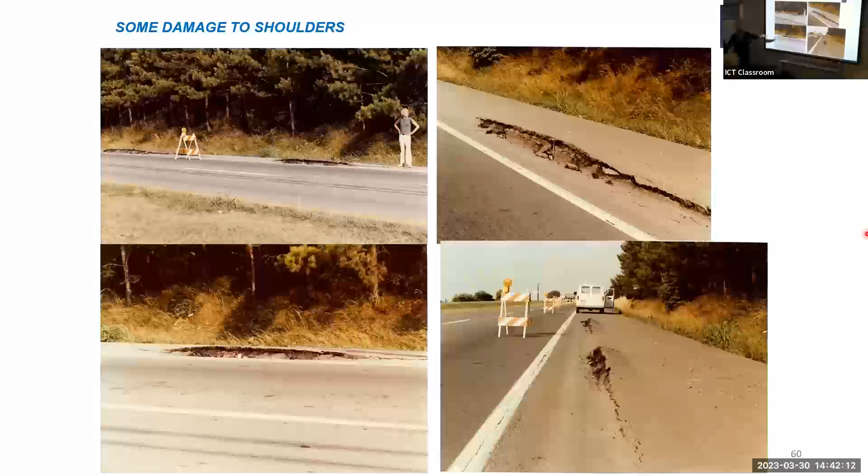Again, this is just another view of that industrial road and some of the pavement, just like icing on a cake. On the shoulder, you see on the far left, there's no shoulder over there. So the contractor's already a foot over onto the shoulder on the right, and occasionally you got some ruptures of that shoulder pavement. Then they go across bridges.

Any idea how you go across that bridge? I know I'm almost out of time here, but I'm almost done too. Well, shore underneath. Very easy, okay?

This was interesting. This was the very first part of the route. They had to go under I-40, and they couldn't go under it. So they had to build a temporary bypass that went down in the lower ground here.

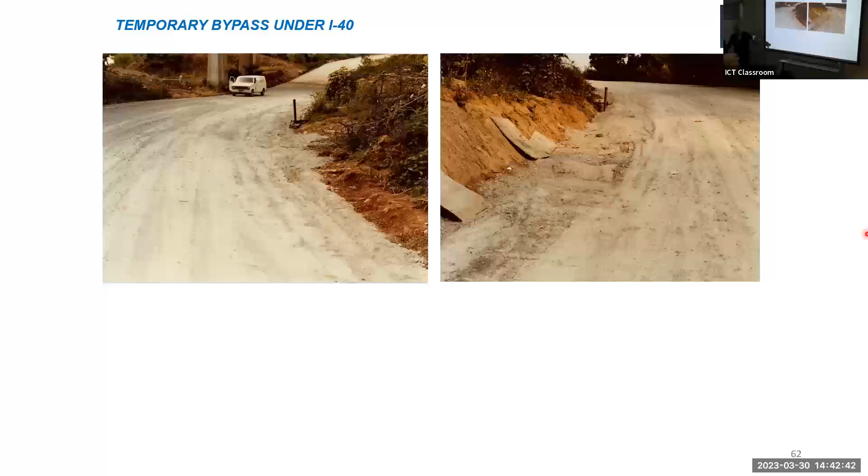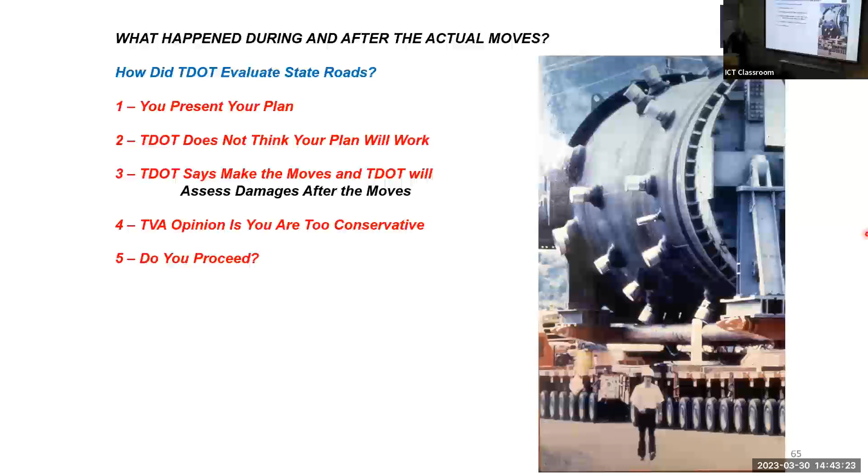So what did TDOT do? We went to them, they said, well, we don't think your plan will work, but move it and we'll assess damages afterwards. Not a good idea. You don't know what the ground rules are and what the penalty is going to be. So, but you have no choice. The contractor's got the bid, the contractor's got to make the move. You go and do the best you can.

For their evaluation, they selected 15 sections and did elevations across the cross sections. Of the 15, one was not traversed; it was a control section, and 14 were actually traversed. They did elevations across sections, Benkelman beam deflections, in-place density with the nuclear method, and thickness of the asphalt base. They did this before the move and after the move, before move was in May, after move was in July.

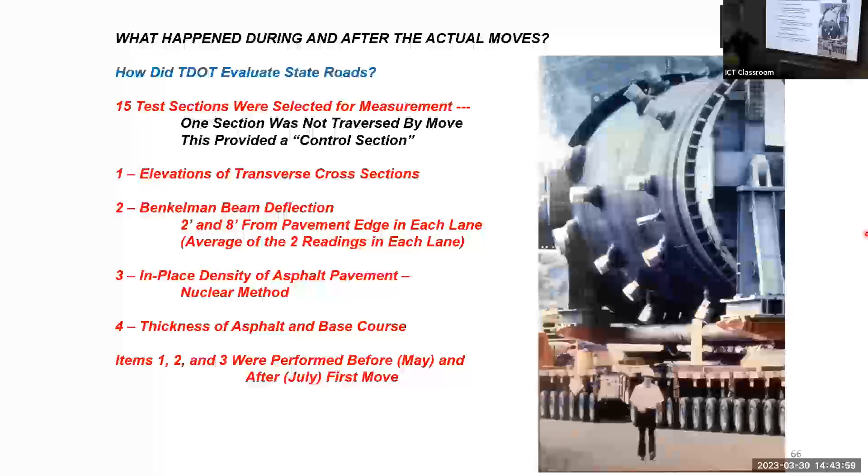We went through their data, and they didn't correct for temperature, but made a hypothesis that the deflections and elevations before and after the move were equal. If I can't reject that, then I make the assumption that the move had little impact on the pavement. And that's what we were able to show.

How would I do this thing differently today? There's a whole host of things that I would add to what I'm doing: video recording, GPS, GIS, falling weight deflectometer, to find those strong and weak areas of pavement so I can strategically locate the destructive test.

I'm not just out there poking blindly, okay? Radar scans, seismic analysis, surface waves, continuous video, laser distress, no CBR tests. I probably still would perform CBR tests. You know, if it worked in the past, it should still work. Maybe you get a handful of those for comparison.

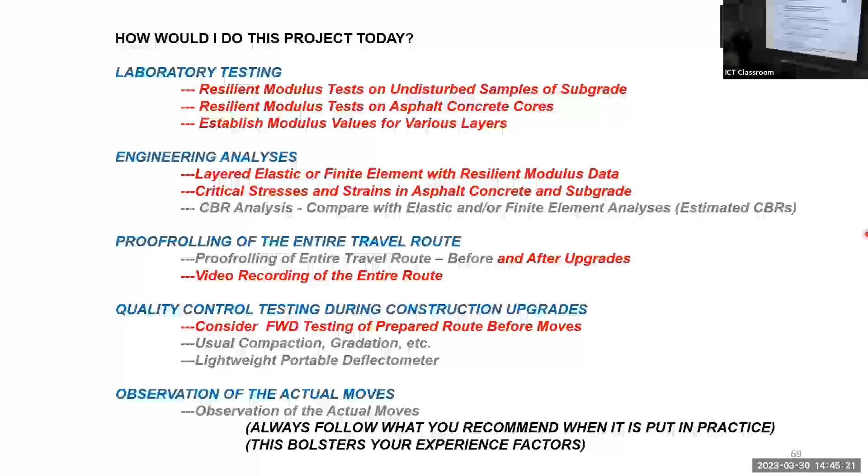Go through your fancy analysis of today, compare it to the crude analysis of the past, okay? And always go out there and proof roll before you move it. And resilient modulus, layered elastic, use all that stuff to get it. I would do a falling weight deflectometer before and after the moves to see, and again, go out and observe what goes on, so you can see how it actually performs.

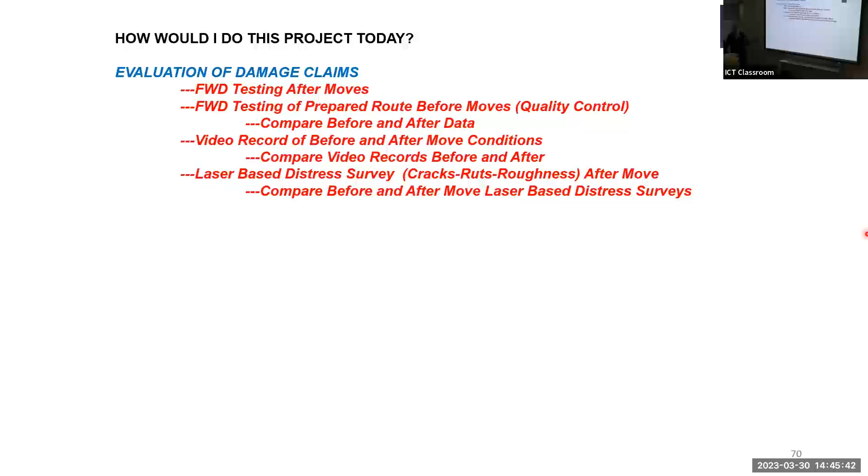And evaluation of damage claims. There were some damage claims, we don't have time to go into them. They were very nominal, about 1% of the project cost. But the contractor had not budgeted any damage claims. So that became an issue to talk about, okay?

So, okay, I keep going the wrong way here. And this is interesting, and I'll close with this.

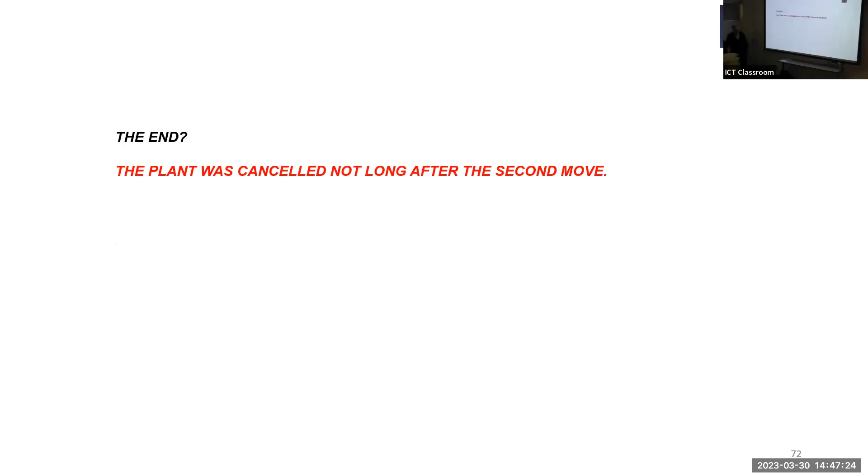So anyway, one last thing. The plant was canceled not long after the second one. Most of you weren't around when Three Mile Island occurred, but the nuclear industry really tailed down after that, okay? And so the plant got canceled. You can Google Phipps Bend nuclear reactor pressure vessel and get some information on it.

If you Google the heaviest load ever moved across North America, which is no longer the case, you'll get a link to a YouTube video that shows the actual move going on, someone has posted that. And like all good projects, the first RPV, they don't know what happened to it, I don't know what happened to it. And there's people arguing that the second one was never moved. Now, I didn't see the second one move because I went on to other projects, our people in Knoxville took care of that. But like all good things, there's always a conspiracy about something.

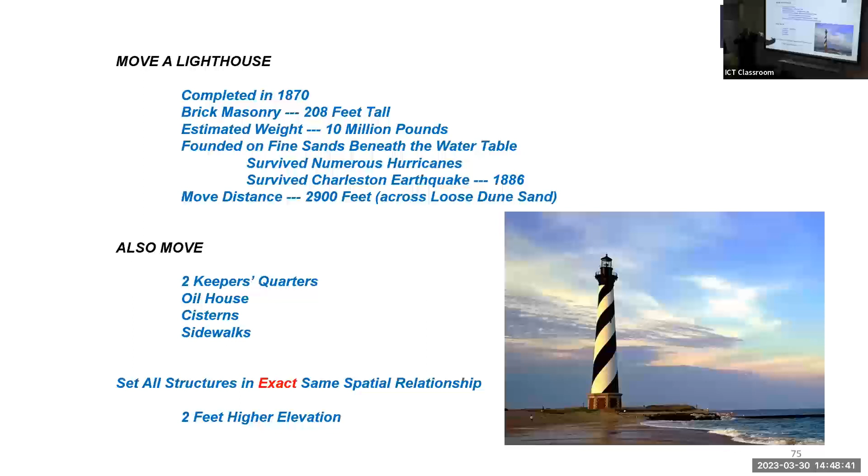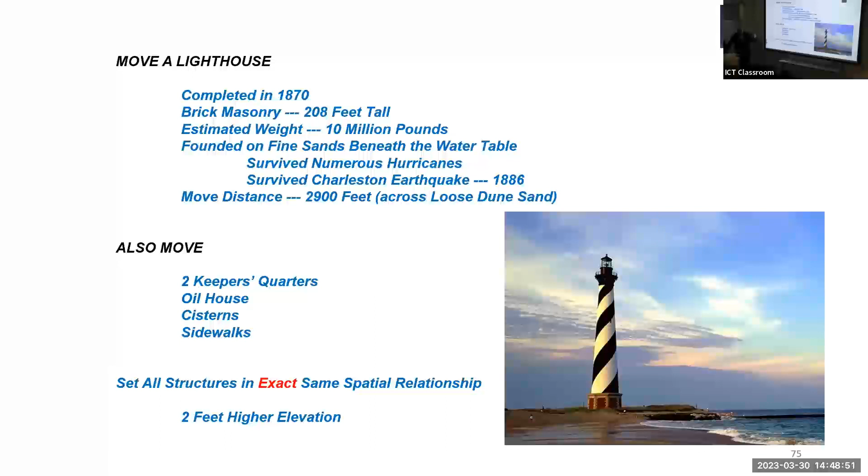Now, when you read your contract, you can't do exact, you know, what's the tolerance? Think about tolerances on things, okay? I think I did go over a bit.